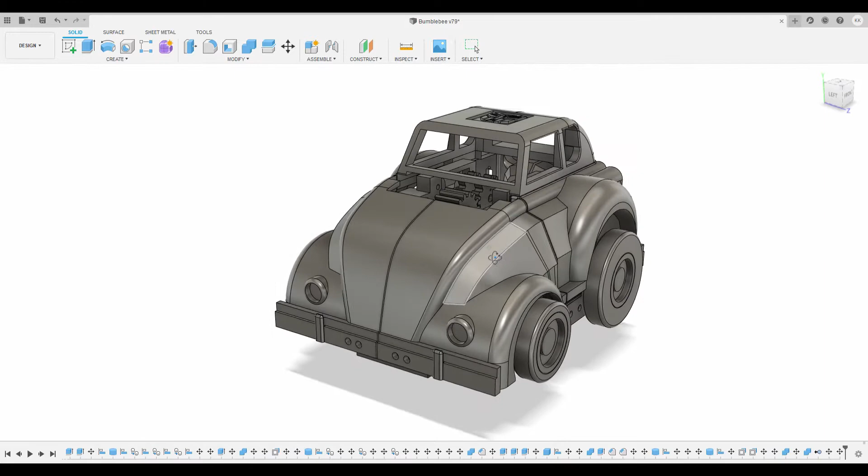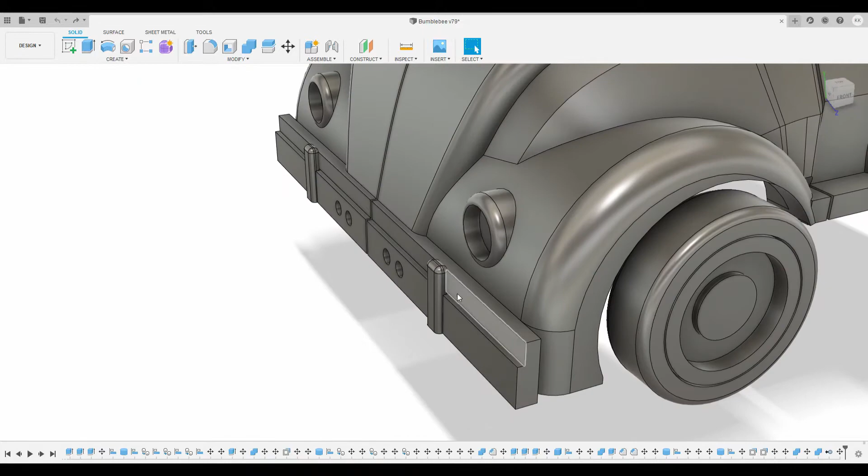So a lot of changes have been made in the CAD since last time. Let's start with the car parts. I added headlights. They're not exactly like how the toy is. They stick out a bit more, but I didn't want to put stickers on it. I thought that would look kind of tacky. I changed this bumper so that it matches the toy with these little parts that stick up and the two-tiered design. I added holes for mounting points for the front and the rear parts.

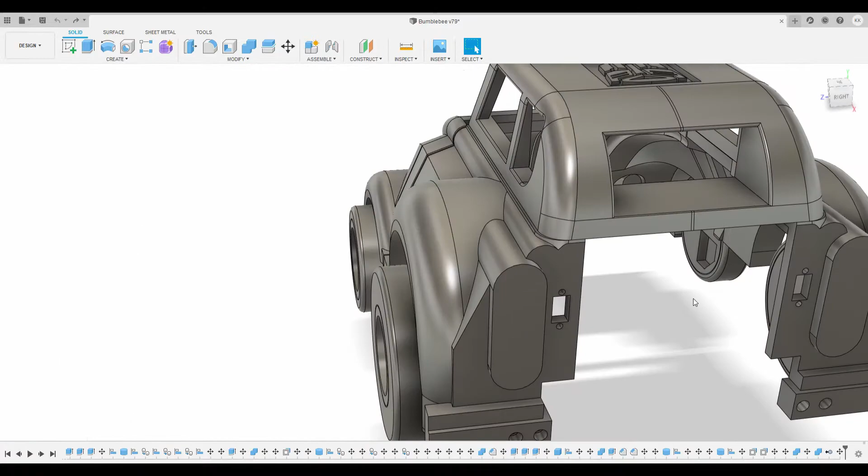I split up this section. This was the top section, and then this one body section here. These are now two separate parts. They're mirrored, so they're identical. And then added mounting points as well. The reason these are two separate parts is because the head is in between them, and I had to raise up the head a little bit, so it just made sense to have this be its own part.

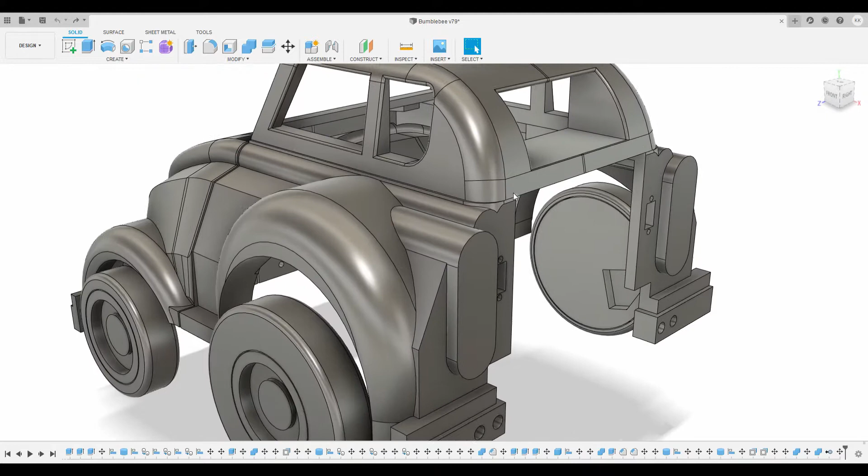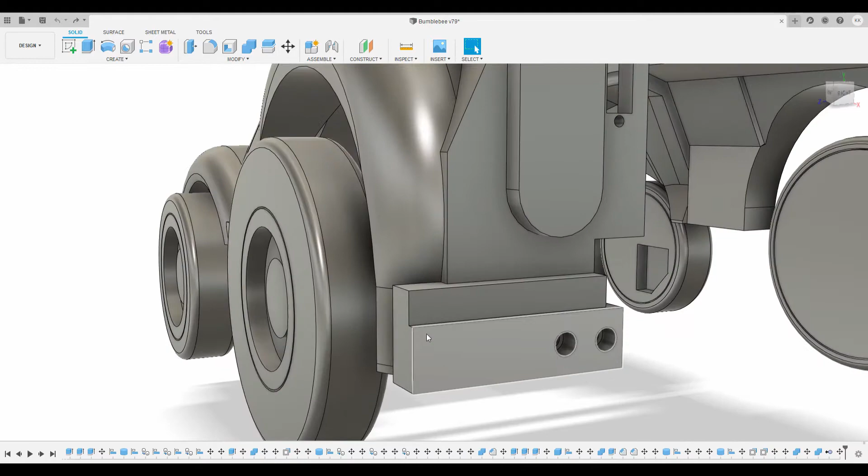There are now mounting points. Let me move this up a bit here, and then matching ones here. For this top part, I added mounting holes. It's kind of tough to see, for the Arduino, which sits up front here. So yeah, a lot of progress has been made. I also matched the design of the rear bumper to the front one. Extended this down a little bit more.

I added these holes here, which is something I actually haven't done in the project yet, but eventually there will be switches, one to power the Arduino on, and then one to toggle if I want it to be in robot or car mode.

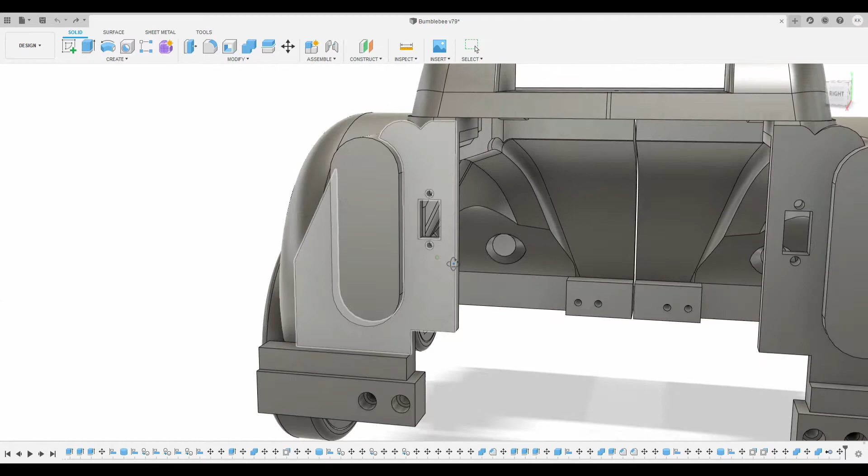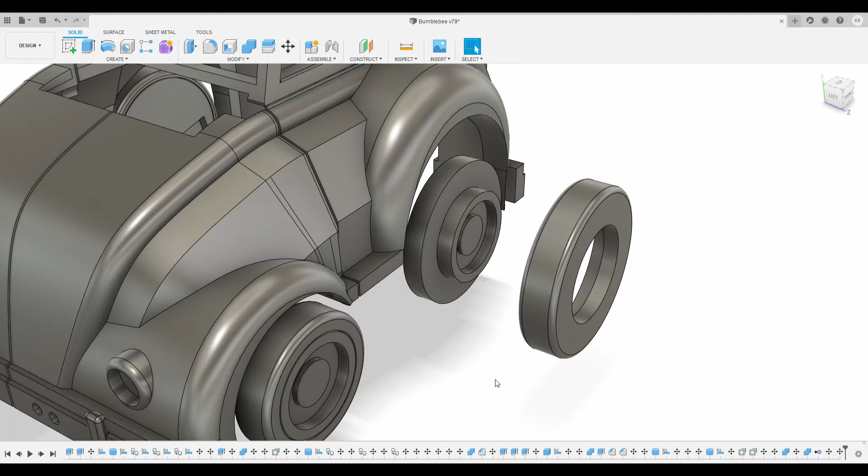The wheels I also finished. They are a pretty simple design. So it's just a black tire that goes around a gray wheel, just like in the toy. I didn't print these in rubber or anything. They don't roll, and they're not going to. And right now, you'll see in the toy, I haven't painted anything. The weather doesn't really work for painting things right now because I have to do that outside. So this project probably won't be sanded and finished for quite a while, if I ever do it.

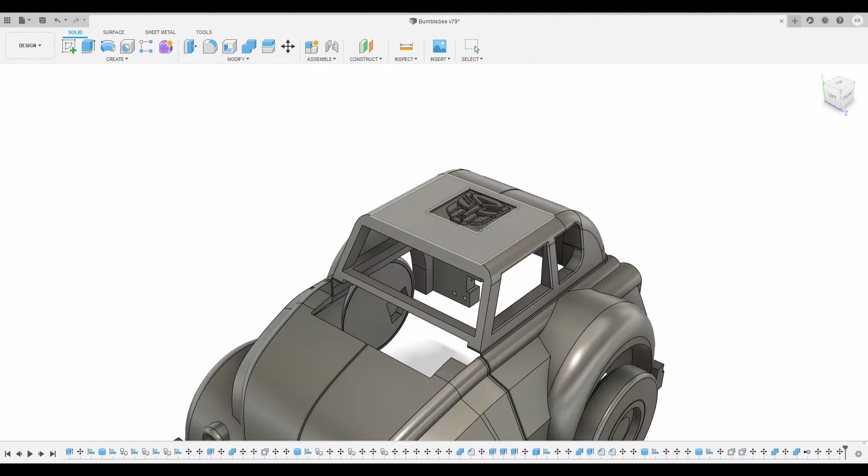Then I added an Autobot logo here. I made this a separate piece so that I could have this in a different color, because I wanted this to look complete even though it's not finished painting. So all the plastic parts are more or less the correct color. So this I printed in red while the rest of this is yellow.

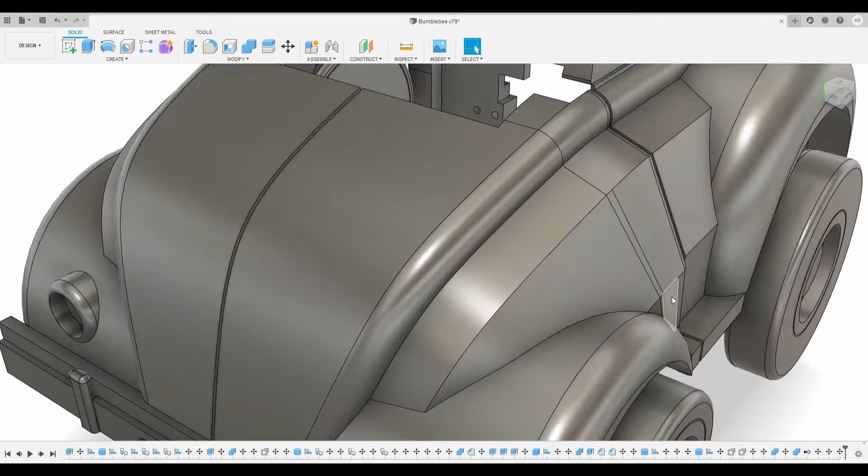So I think that's all the changes in the car body parts that I made. There might be a few other ones, like I made this smoother to match this a little better. It sticks out slightly in the toy, so it sticks out slightly here. Also, these parts aren't going to align perfectly in the transformation, so it's not the end of the world.

So in the last episode, I promised you guys a time lapse. I actually have two here, one for the front of the car and one for the back. Obviously, I printed two of each of these, one in each orientation, but I'm only showing the time lapse from one of each. A couple of reasons for that. One, my phone kept crashing while recording the time lapses, so I'm going to try to get a different time lapse app for it. The second is it would have just been a repeat of the same part, but flipped over the center axis. But yeah, in the future you can expect more time lapses like this.

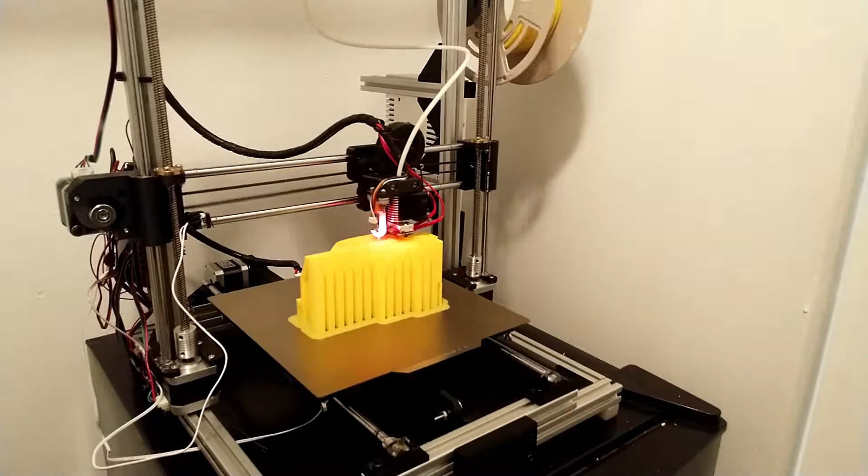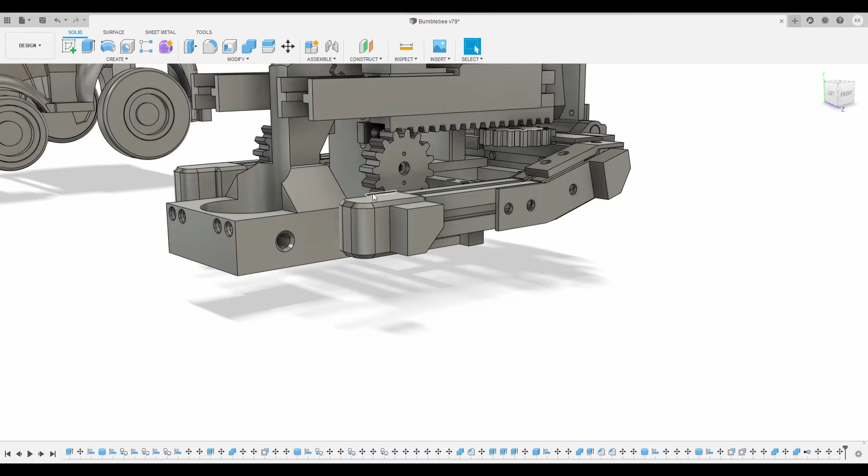But yeah, on to the robot itself. I added hands to it, as well as mounting points for the wheels. So these are basically just squares that have a chamfer on one edge, and that's just to make sure that they're in the right orientation, because this isn't in the center of the wheel, so the orientation does matter.

If you look here, I modified, I actually kept this left one here, these parts, which are the ankle axle mounts. So with the increase of all the mass from the car parts, basically these gears were slipping.

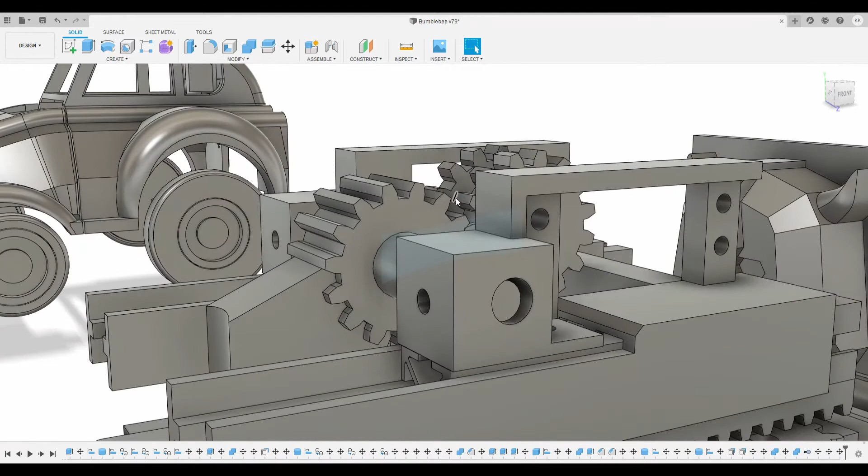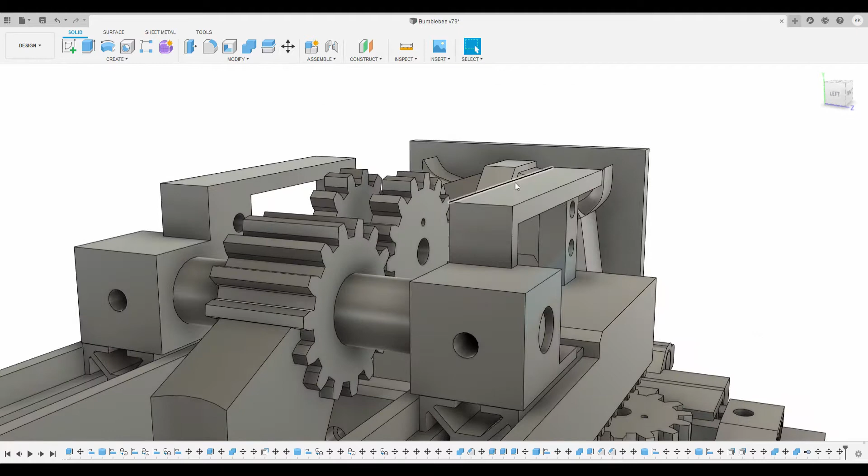And it's already kind of an issue because it was already really heavy. So what I did is I moved this hole over about 1.5 millimeters, and that has for now fixed it so that these gears are closer to each other. I didn't change it on this one just so you can see the difference. I also lowered this part slightly, I think by about 1 or 2 millimeters. Basically just gives it clearance when this is moving.

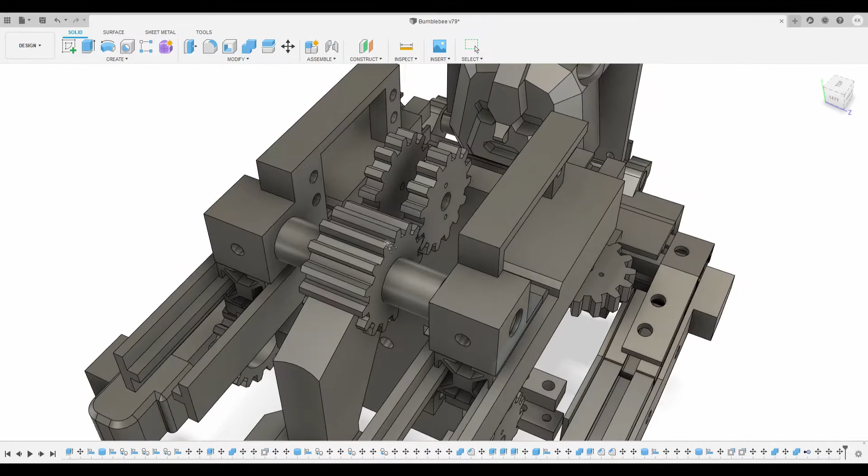I increased the length of this. The legs extend a little further now. It's not as far as I'd like them to extend, but I'd need a complete redesign of the ankles if I wanted to extend it further, because basically as all of this mass moves backwards, these servos have to do more work, and it's barely able to lift the weight right now. So I extended it as far as I can. I actually have a video of what happens when it fails, so I'll make sure to show that.

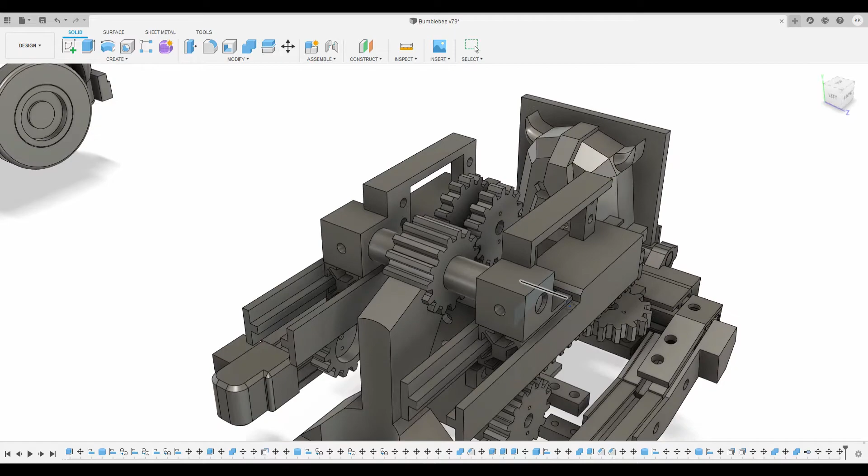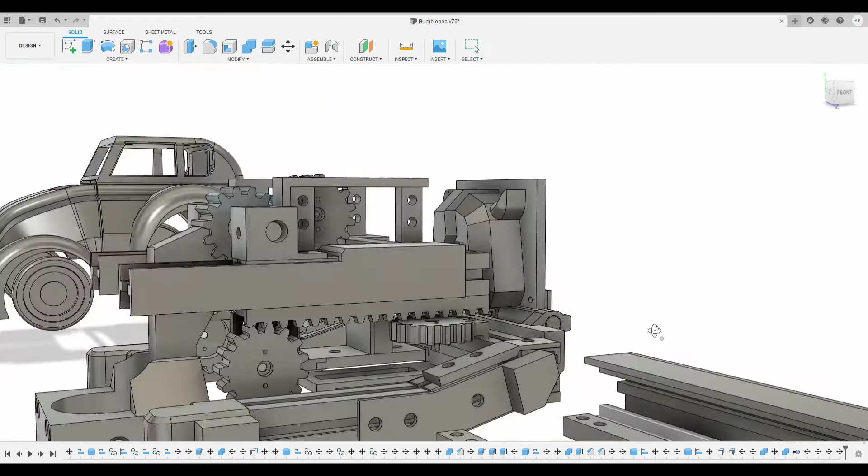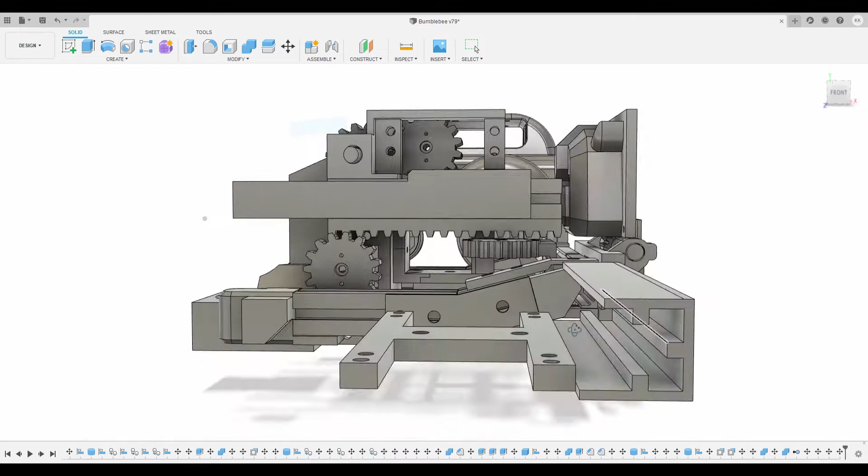So the arms were looser than I'd like them to be. So what I did was I made it so there's rails on 4 sides now instead of just 3. Actually, there was 3, but one of them was this axis here, and then the top was completely empty. Now, the top has this rail here, the bottom has this rail, right side has this rail, and the left side has the gear. So it's between 4 sides, whereas before it was just between 3. And that makes the arms a lot tighter. They were just kind of loose.

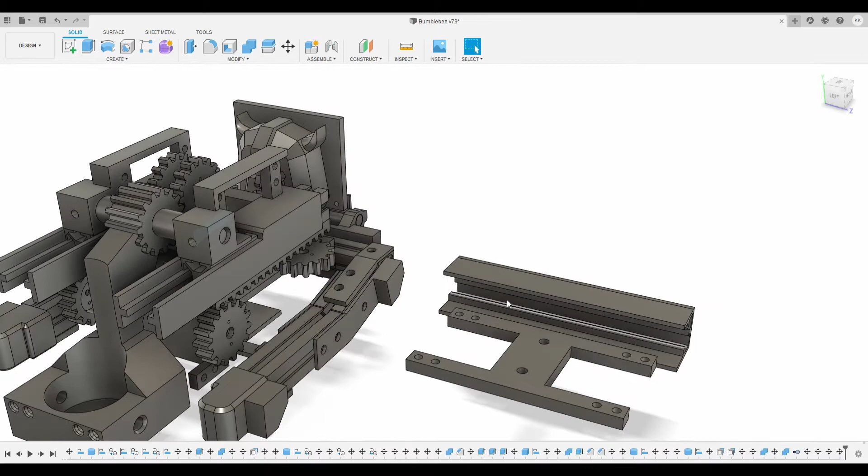So I had to change the gears also for this because the new part sticks out quite a bit further. I don't have this aligned perfectly, but I'll show you it in the video. But yeah, so that basically just made it so the arms are less loose.

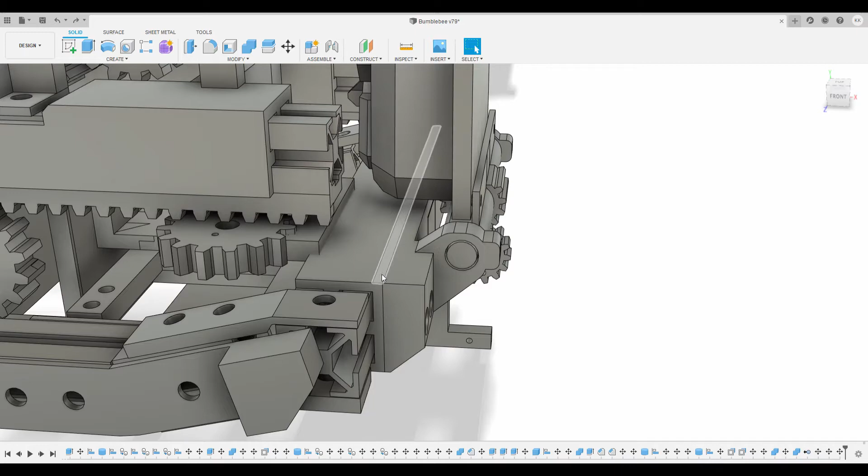I also had to change this part here. I made it a separate print from the main body. And the way it's aligned is just with a little hole with a notch there. It makes it so that it takes less time to print both, and also they can be in the correct orientation while printing so things don't break when tightening the screw in here. I was having these break. Also I added the holes for the mounting points for this. I just used threaded inserts just like for everything else.

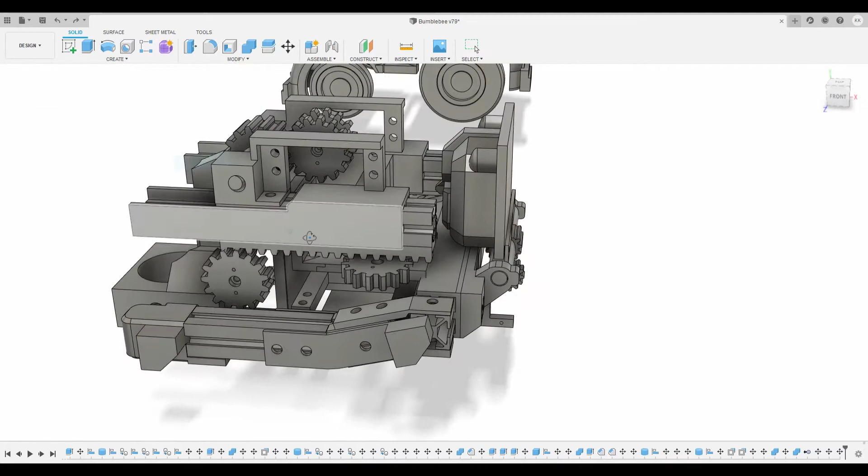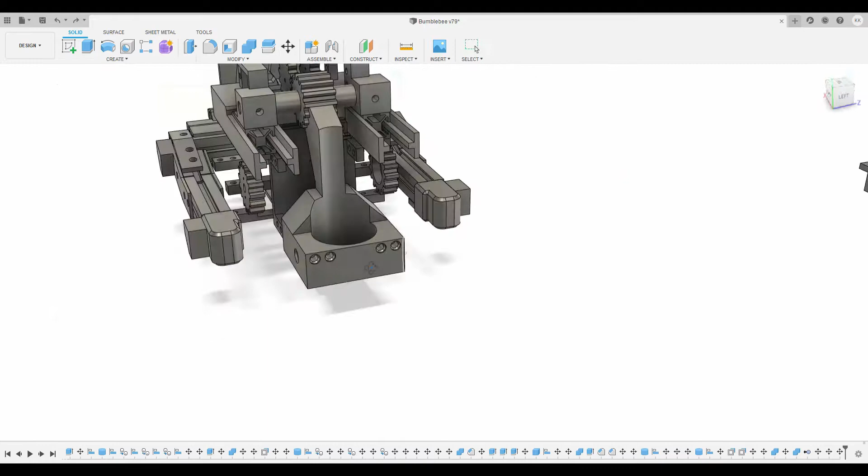I think that's about all the changes. I made the leg rails longer. That's just so that I can extend the legs further. Oh, another part that I forgot is this right here is for the magnetic base plate. I haven't talked about that at all. So basically, I talked about this last time a little bit, but there's a magnet that goes in here, and it's just held in place with 2 screws.

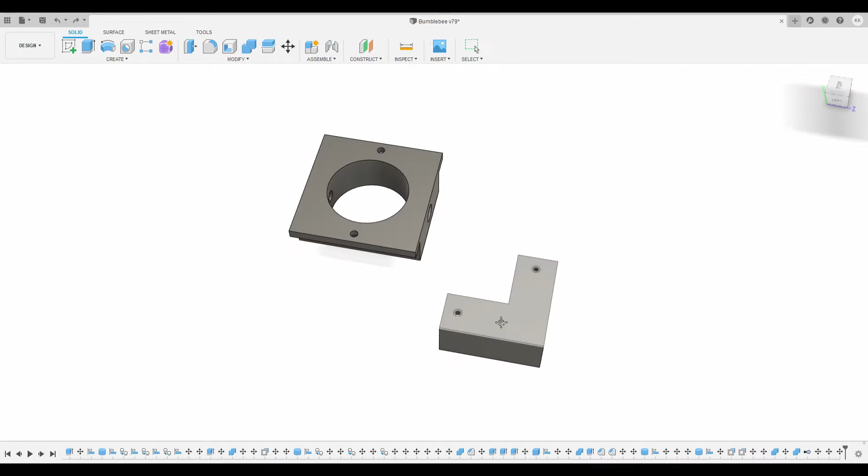So I cut out a piece of MDF, have the magnet in here. I don't even have threaded inserts to hold it in place just because the force from the magnet holds it in place. So I made this, and then I also have 4 little corners to it. Eventually I'll make the base a lot more aesthetically pleasing, but for now this works just fine. So I basically just have 4 of these, 1 in each corner, and that just makes it so it sits flat. But I'll show you that when I show you guys the actual robot.

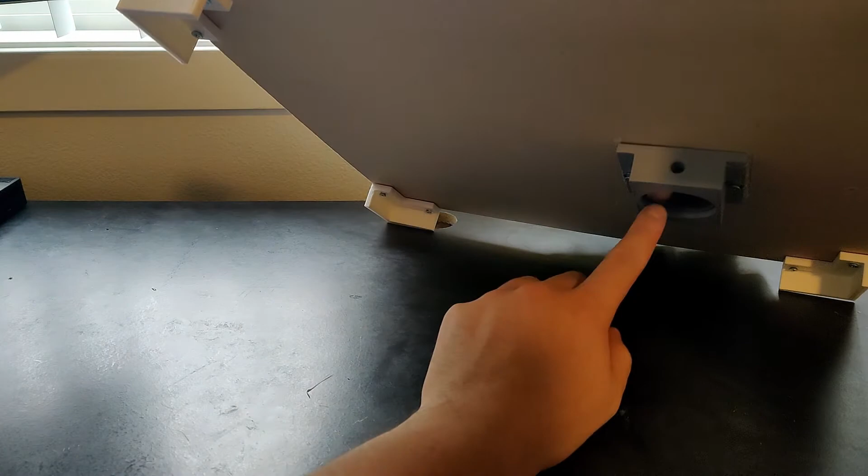So here is Bumblebee. Let me show you guys the actual toy for scale. It's a lot bigger. So this is the magnetic base plate I was talking about. Right now it doesn't look particularly pretty, but all it is, it's got the 4 corners and then a big magnet right there. I believe this is about a 200-pound magnet, and it works just fine. I was going to go with a stronger one, but it looks like I don't need it.

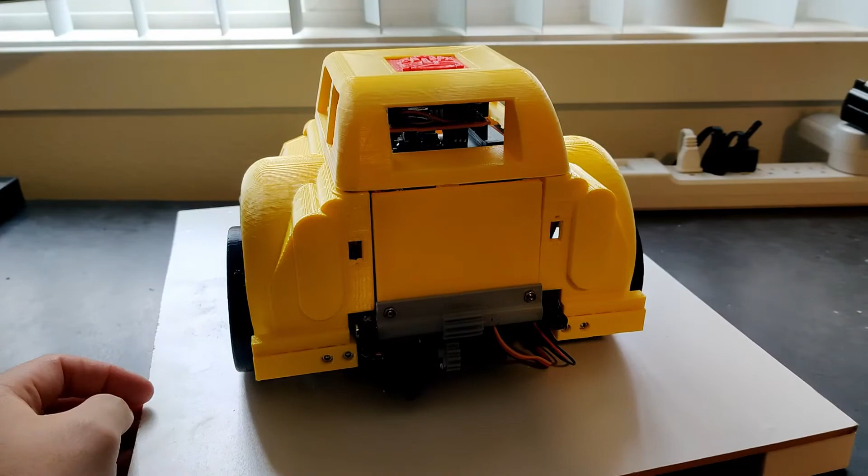So yeah, there's a couple things. These parts don't align perfectly. That's because the way they're mounted, let me focus on this, is back here. And this is a part that's glued on to another part, and there's threaded inserts in it. So if not everything is perfectly aligned, then obviously it's not going to align perfectly. But it's not too much of an issue.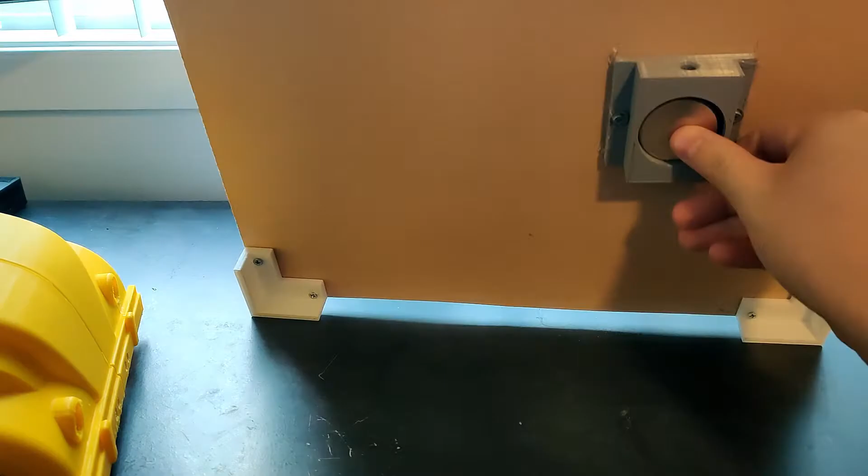This thing is very big. I'm going to take it off this base plate. The way I do that, it's kind of difficult, is you have to push it like that. So then you see there's just the magnet here, and I just have to go in like that. So here's Bumblebee by himself.

So I decided to put the Arduino and electronics up in the top. This is for a couple of reasons. Main one is ease of programming. This is on here magnetically, so it just connects like that. And it's actually kind of difficult to program Arduinos while servos are plugged in. So what I usually do is just take this off, and then I just unplug the shield, and then I just have this top plate.

You can see the Autobot logo looks pretty good. I actually have printed this piece in black. I kind of like it in gray, because I have to leave this opening here for when the legs fold up, and it kind of looks like an engine, and I like that design.

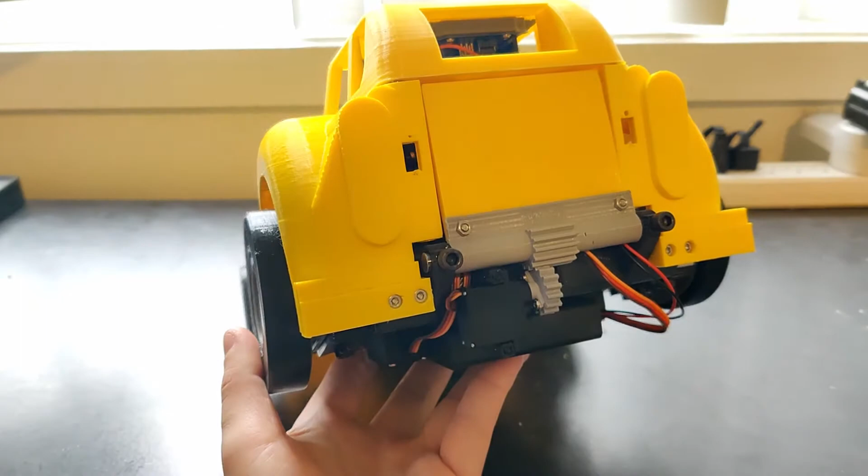So on the back, you can see the head here. I changed out this motor for one that was a bit more expensive that doesn't twitch as much. Sorry about the focus. But yeah, you can see these panels here, these two ones, are slightly different colors. That's because I ran out of the PLA I used for these pieces, and I actually did print these earlier.

In a minute, I'll show you guys all of the not failed prints, but prints that I had to modify the design of. I have a whole bag of them for this project. And these were some of those. Basically, I was having an issue where right here, it was colliding into the servo, so I had to add a bit of like a chamfer to that. But it works now.

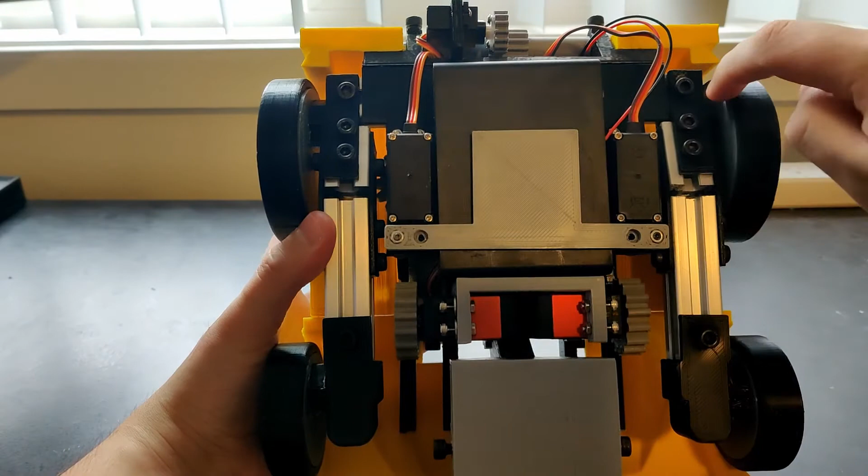So let me show you the underside of this. So you can see the arms here, the wheels attach, just like I showed you before. There's this panel that keeps the batteries in place, the servos here, leg servos here. This is the magnet. But yeah. So overall, I'm pretty happy with it. Let me remove a couple of these panels so you guys can see a little better what's going on.

All right, so I have those panels removed. So basically these just have little screws here, and they screw into these threaded inserts right here. Same with this one. Also, you can see the magnets sit flush like that. And this screws in right here. So this is kind of a cool cutaway view of it.

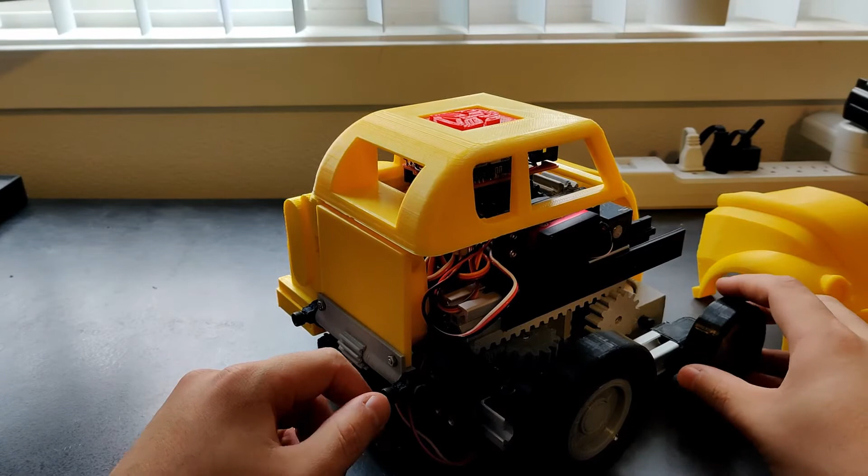You can see I changed how the arms shoot out, and these are a lot tighter now. They're still a little loose, which is actually good because I don't want them taking any weight, because all of the weight needs to be basically mounted here, and there can't be too much friction when it's pushing back. I already have a few issues with that.

You can see the way I did the wiring. I have not zip tied the wires yet because I'm not 100% sure exactly how I want to do that. But basically the battery and the head wire come up through this little gap here, and the rest of them are kind of just wired in place. You can see that.

So the plan for the tutorial is to basically make it like if you had a kit for Bumblebee. So I'll link all of the 3D printable parts in the description of that. You'll print all of them, and then I'll have a bill of materials for everything you need to build one for yourself. Buy all those, then you'll have all the components on hand, and you can just build it by following the tutorial. I'm hoping to have that done in the next 2 to 3 weeks.

It's going to take quite a bit of work, but I think it'll be worth it because I've had quite a few people ask. And there's quite a few finishing steps that need to be done on this project, especially because like this bumper really should be silver. I might not wind up doing all the sanding and finishing, but I for sure eventually will have everything painted to be the correct color.

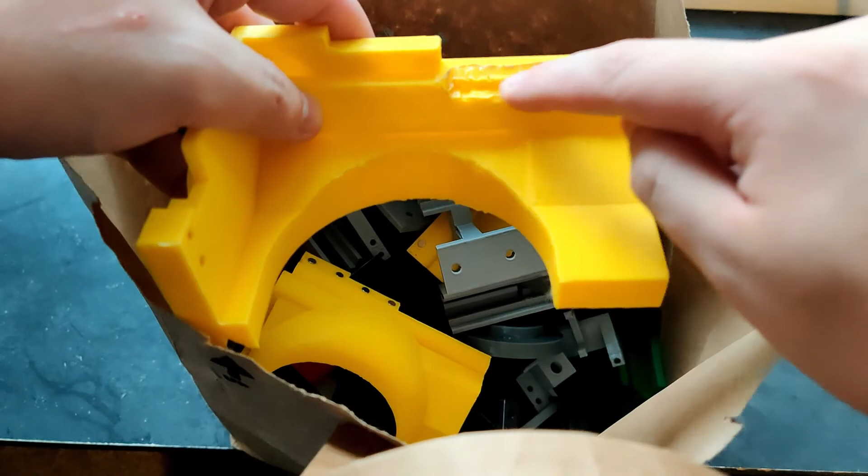But yeah, so I guess the next thing I want to show you guys, because this is kind of more of an in-depth video, is just how many parts I 3D printed that I wound up not using. So let me go grab that bag. So here is the massive bag of parts that I have that I've 3D printed and were just different iterations. You can see these side panels for the car. Wound up taking a soldering iron to them to try to make everything fit.

Wound up reprinting that. This was an older design of the arm rails as well as servo mounts. This was a design for the legs before these were extended, and when I tried to do it all in one part, obviously didn't work out, so I had to push that into 2 parts. This was an earlier ankle axis, the original track for the legs. Actually, that's not true. This was the original track for the legs. Just a bunch of different stuff.

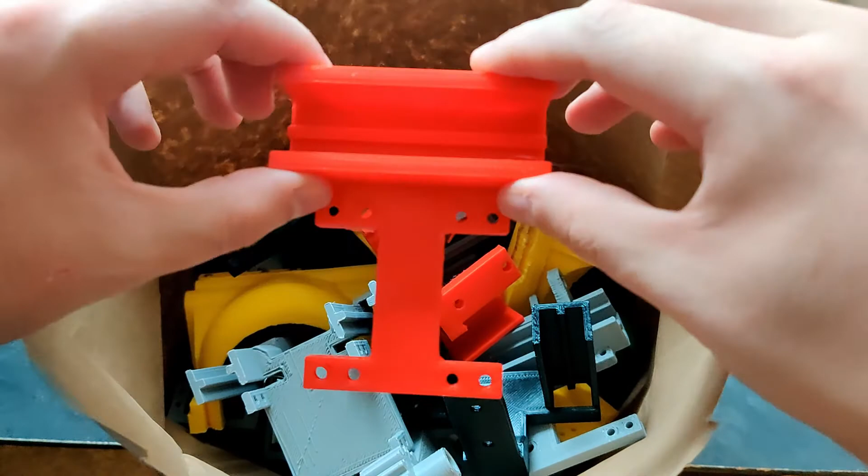The original track for the arms. A lot of the red and green pieces in here were all like R&D pieces, basically. The original mount for the leg servos, or the ankle servos, back when I had no idea how I was going to do that. So yeah, there is just an absolute crap ton of parts in here. Probably weighs like 5 pounds.

You can see it's a full paper bag just filled with parts, a bunch of different gears. This is kind of just what goes on in the design process. It kind of sucks. This is all going to waste, but the final product was definitely worth it.

But yeah, thanks for watching this video and the series. I know this was kind of a long video, but I had a lot that I needed to explain. A lot of progress made in this episode. My next video should be a tutorial on how to make this if you want to make one for yourself.